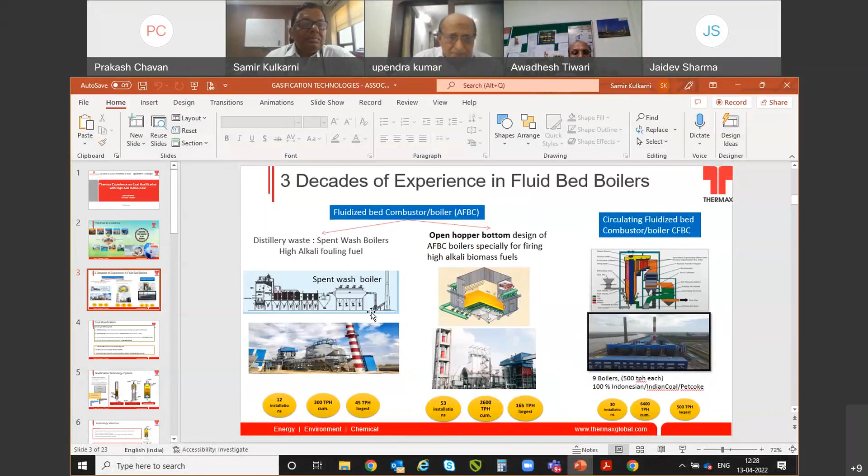Thank you, sir. Can I have the presentation share rights, please? Yes. I'm not able to share the presentation. Yes, sir. Now you can share, sir. Okay. Sir, I think sharing option is not active. Yes, it's visible. Your slides are coming. Is it visible now? Yes, sir. Thermax experience on coal gasification.

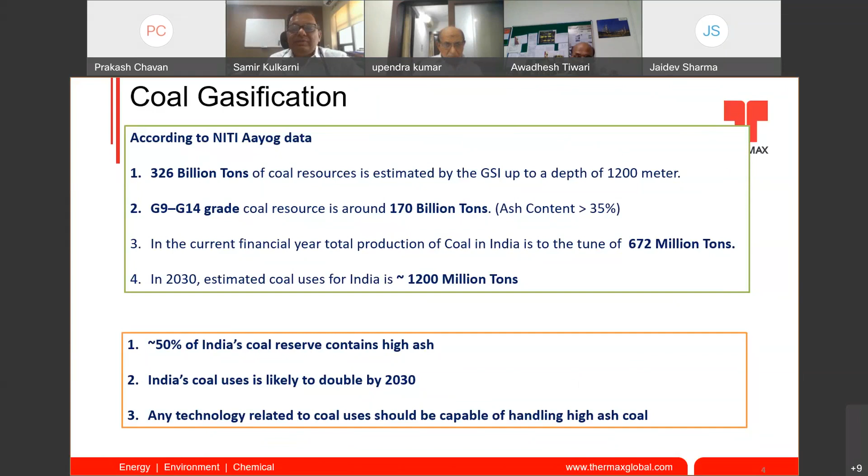So I will just take one slide on the different types of gasification. We started our journey in 2011 looking at different gasification technologies and what would best fit for India. There are 3 technologies: fluidized bed, entrained flow, and moving bed.

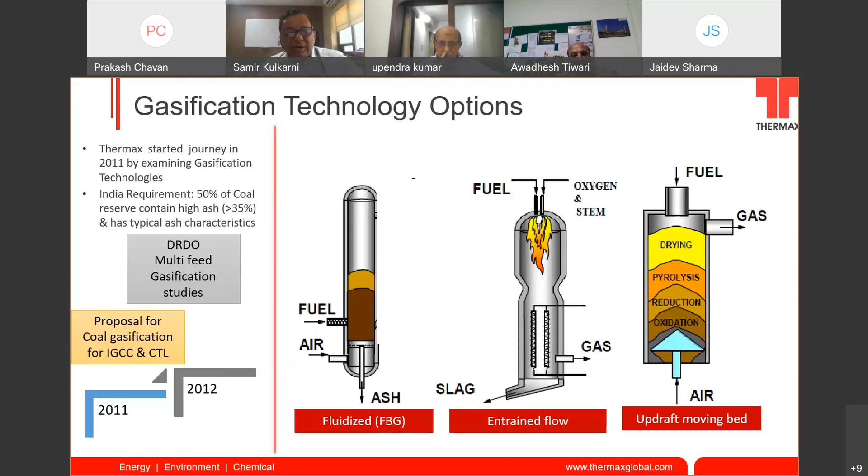As Mr. Tiwari also mentioned, there is not a single technology which is best. All technologies have their own place in this gasification domain. I cannot say fluidized bed is better than entrained flow, but they may have certain advantages and disadvantages when it comes to application, or gasifying different types of coals and producing the required quality of syngas.

So look at the moving bed. It needs a specific feedstock which is less tolerant to fuel quality. It cannot accept fines. In a moving bed, there is a high tar yield, requiring more downstream cleaning equipment, and it becomes difficult when we increase the ash percentage in the coal.

Similarly, the entrained bed requires pulverized coal. Typical Indian coal has more than 1300 degrees ash fusion temperature, so you have to use a lot of flux agents to reduce the AFT, at 35 to 45% ash. The slag removal becomes challenging, so it is more suitable for low ash and high carbon fuels at large capacities.

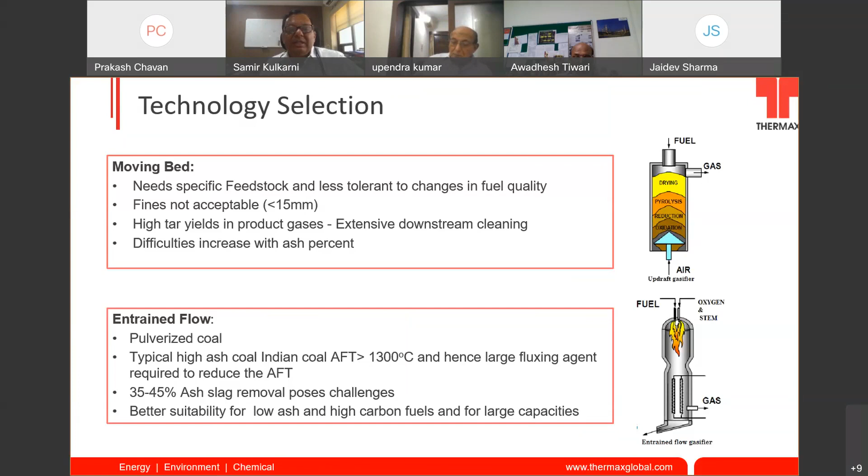These two technologies will generate syngas which is much higher in calorific value compared to the fluidized bed. Whereas with the fluidized bed gasifier, it doesn't require elaborate pulverization mechanisms for feeding. It can accept 0 to 6 mm, so fines also can be accepted.

It can work with medium reactive fuels. It can accept high ash content coal. Its operating temperature is lower, between 950 to 1000 degrees centigrade, well below the ash fusion temperature. So the reliability and availability is much better.

Then it can have better heat recovery and integration, because it is not going into the slag zone, so we can integrate the heat recovery sections in a much better way. And at that operating temperature, there are no heavy tars, so with simple gas treatment, it can work.

So we decided to work on this, and like other Indian institutes such as CIMFR as well as BHEL, we started our journey with the fluidized bed technology. Fluidized bed has different regimes, bubbling - I will not go into those details, but I will take you through the journey of how we started our development a decade back, working in turbulent bed mode, and then looking for a high pressure design up to 30 bar.

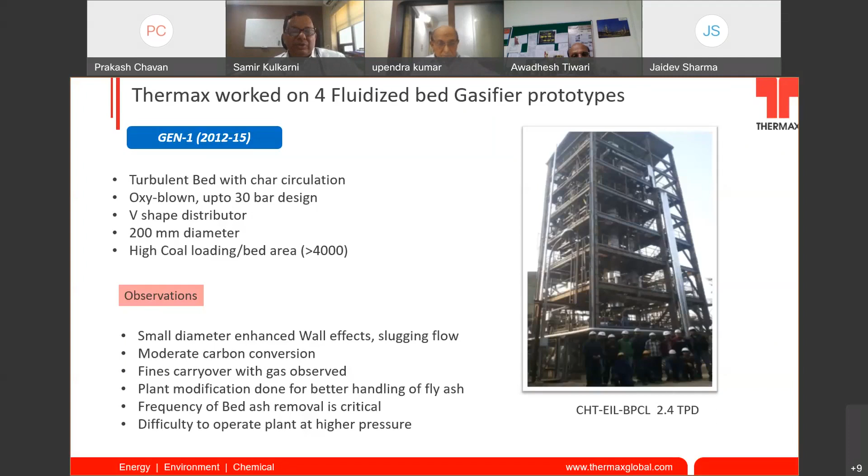So for our next generation fluidized bed gasifiers, we reduced the pressure, operating at 6 bar or less. We built another two gasifier prototypes with a bubbling bed.

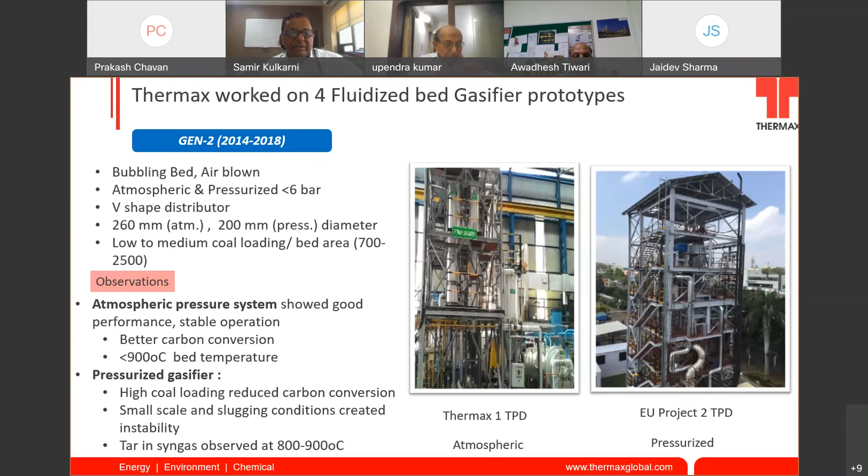One operated at atmospheric pressure, one at pressurized conditions, and all of them had a provision to work under air-blown mode or oxy-blown mode. With these two new prototypes, we overcame many of the challenges. We improved the carbon conversion, and the diameter also became much bigger.

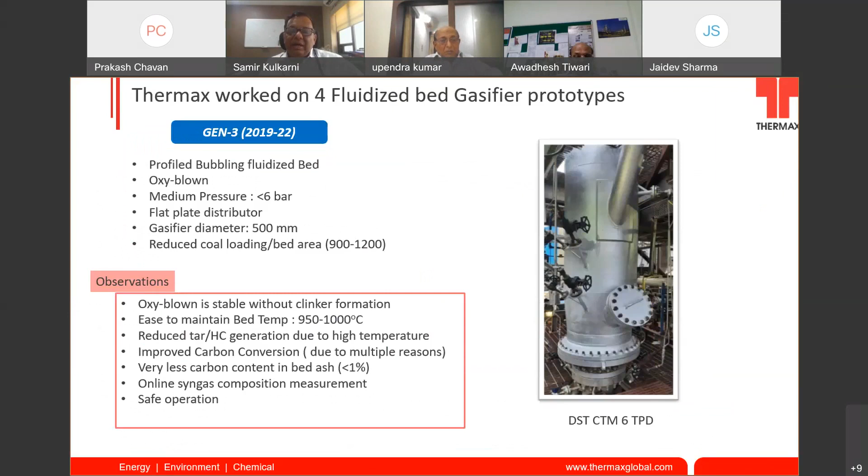So then we went into another model where we went to a much larger diameter and optimized all the parameters for this gasifier. This is the gasifier working for the coal-to-methanol plant, which we recently commissioned and successfully generated methanol. This project was in collaboration with IIT Delhi and funded by DST, with Niti Aayog also very much involved.

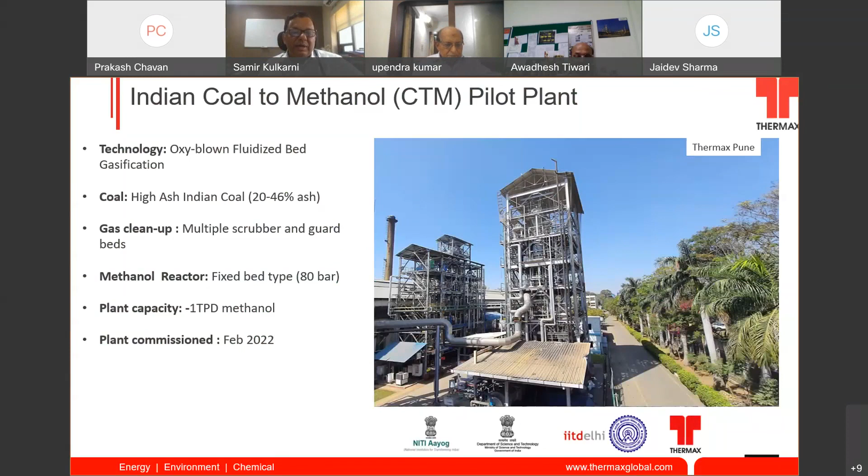We have also tested 46% ash in this particular model, and we are operating it under oxy-blown conditions, connected with all the downstream equipment - gas cleanup as well as the methanol reactor. Since February, over the last 2-3 months, we have been conducting a lot of trials on this.

Basically the gasifier is only one island, and when we want to use it for other applications like methanol production, ethanol, hydrogen production, or other chemicals, it has to go through a different gas cleaning system, because it naturally has a lot of impurities in terms of tars, ammonia, COS, mercury, H2S, or CO2, which needs to be removed because these are toxic in nature for the downstream equipment.

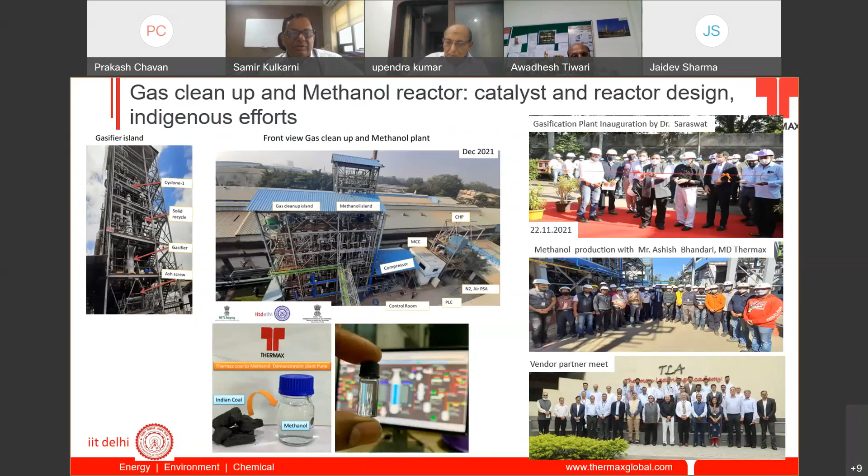We have understood all these things, and now the plant we have built here is stabilized - we are able to generate methanol from coal, and a lot of optimization trials are going on.

Before we constructed this plant, we had done a lot of work on the CFD, because in a fluidized bed, the residence time is very, very important. And to arrive at a particular residence time, what should be the bed height, what should this thing be - we carried out radioactive particle studies along with BARC and IIT Delhi, and arrived at the optimum parameters for the bed.

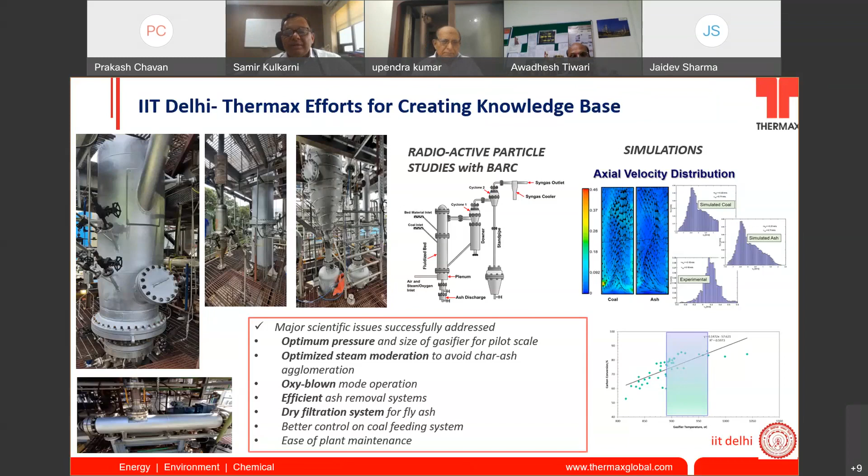So these are some of the pictures of this coal to methanol plant. These are some of the pictures of the test conditions and the quality of the methanol that is getting produced.

We are getting a good hydrogen to CO ratio, and the plant is operating very stably, maintaining the temperature parameters. As you see here, we are using 46% ash coal in this unit.

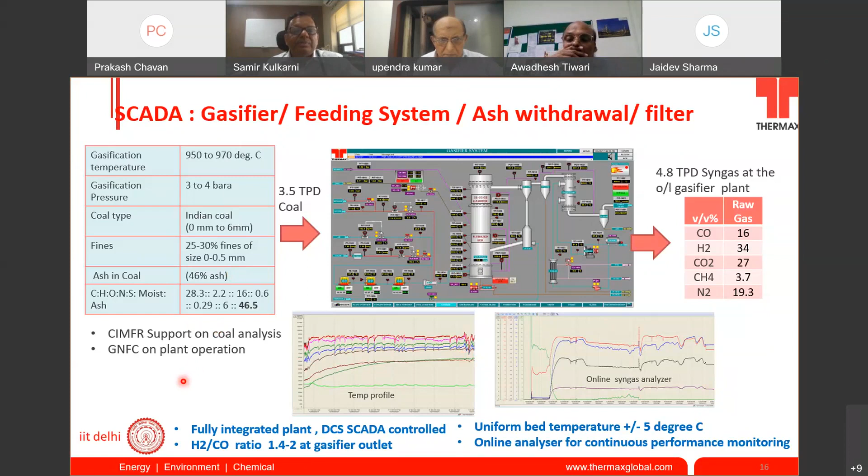Coming to some commercial aspects, since now the pilot studies are over - and we are not stopping the trials. We will be conducting more trials with different types of coals from different mines.

But if you look at the commercial part of this, I'm talking in terms of methanol only right now, because commercially we have seen that the methanol price globally is highly volatile. And today methanol is available at 32 rupees a liter.

And if you look at the cost breakdown structure, normally the OPEX part is about 70% and the CAPEX part is about 30%. And even in the OPEX, about 70 to 75% of the cost comes from the coal and other utilities like oxygen, electricity, water, and other things.

So if you do the mathematics, the operating cost for utility and coal should be restricted within 15 to 17 rupees if these methanol plants are to be made commercially available.

And now, if you work backward, if you want to contain this cost within 15 to 17 rupees, these plants should be at the mine mouth, because it should avoid the transportation cost of the coal.

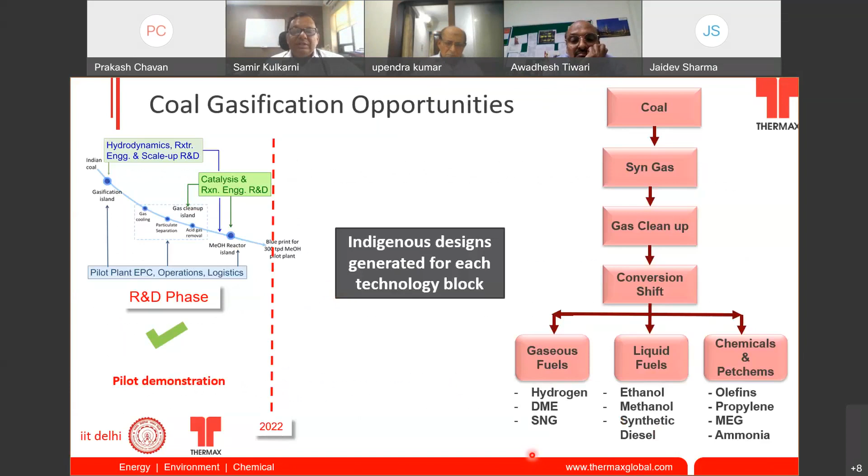Commercially, when all these tenders are coming out, they are in the range of 1500 to 2000 TPD, talking in terms of the methanol plant. So can we go directly from here to the commercial plant, or are there technical risks - do you need to construct a plant of an intermediate scale?

This is something we are discussing with the Ministry of Coal, so that the financial outlay for such a plant can also be minimum. Some financial support is required, because at this scale, whatever scale we do, it may not be a commercially viable plant. So some financial support will be required, and it will need public-private partnerships.

So when we are wondering what should be the plant capacity, we can easily scale the R&D at 25 to about 100 TPD scale, make this plant at about 25 to 100 TPD, and then you don't need any project or financially supported plant. Then we can go directly to the 1500 TPD level.

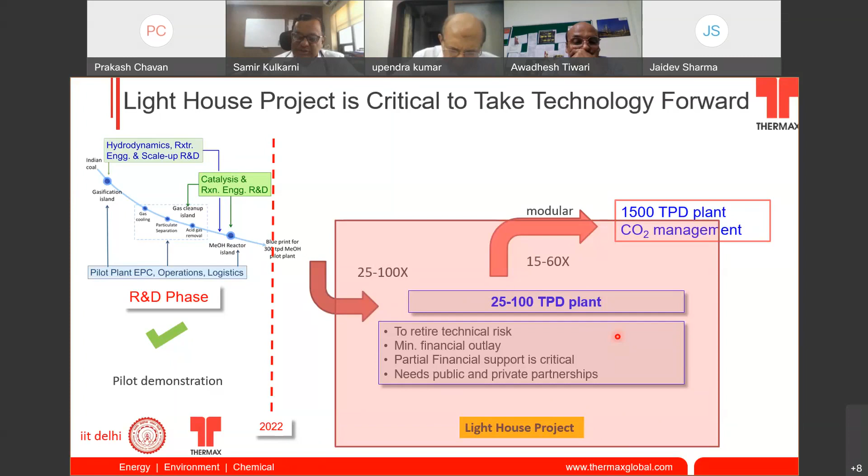So this can be some sort of a lighthouse project which can take the R&D, the indigenous development, to the commercial level with one-step lighthouse project. Of course, CO2 management is a very important point, as also mentioned by Tiwari ji. We are working on this CO2 management, how do you convert it. There are challenges, the availability of green hydrogen at a lower cost, or we are also thinking whether it can be injected back into the mines to generate more CBM. So all these things are going on actually.

So to cut short the story, I'm just making four points in this presentation: fluidized bed technology is well established by Indian R&D centers, whether it's Thermax, CIMFR or BHEL. When it comes to high ash coal, it is the most apt technology. We need a first lighthouse project to take this R&D to the commercial level as an intermediate step. Then there's the coal cost and other factors.

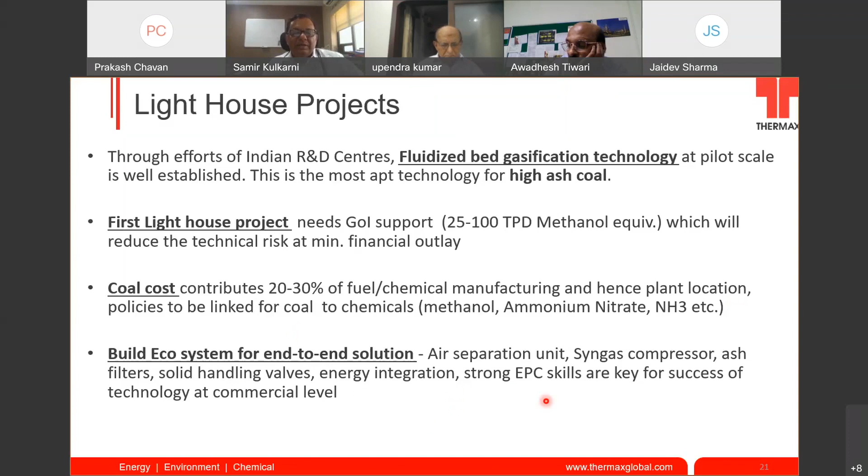We need to look at the commercial viability. We need some support in terms of plant location, policies and other things. We also need to build an appropriate ecosystem for end-to-end solutions within the country in terms of air separation units, compressors, ash filters. There are many components which we have proven at pilot scale, but when it goes to larger scale, we need that ecosystem created, vendors and sub-vendors created for this.

So if you look at coal gasification, this is the total canvas of coal gasification. It can go to power generation with improved efficiency, thereby reducing emissions through the IGCC cycle as one route. You can generate chemicals and fuels from this, so that the carbon is getting fixed when you generate chemicals. When it goes to fuel, it becomes the second use of the carbon.

So there is a decarbonation which is happening. The other thing is there are import substitutes, because there are a lot of industries which use natural gas or furnace oil for heating purposes. Now this coal gas can replace such plants and the use of FO and natural gas for this purpose.

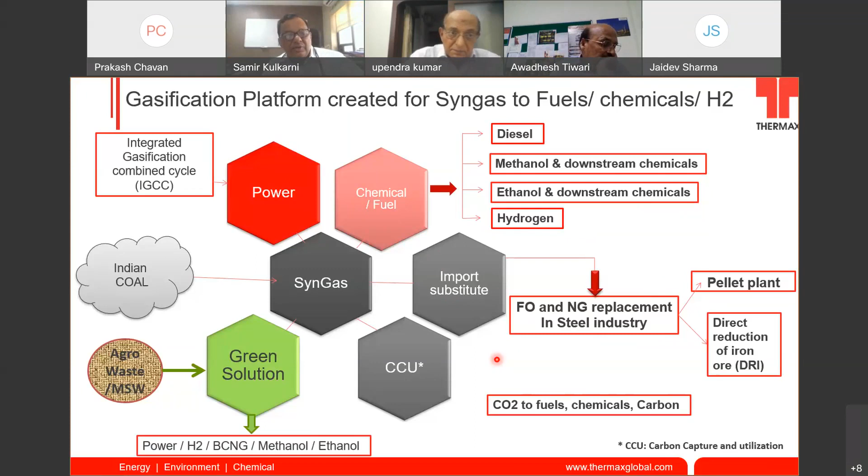Similarly, biomass gasification should not be missed out while we talk about coal gasification, because it's a carbon neutral technology, and there is a lot of work being done in India for biomass gasification also. With this, I think I will stop my presentation here, and I would like to take questions during the last session. Thank you so much.

Sir, you are on mute.

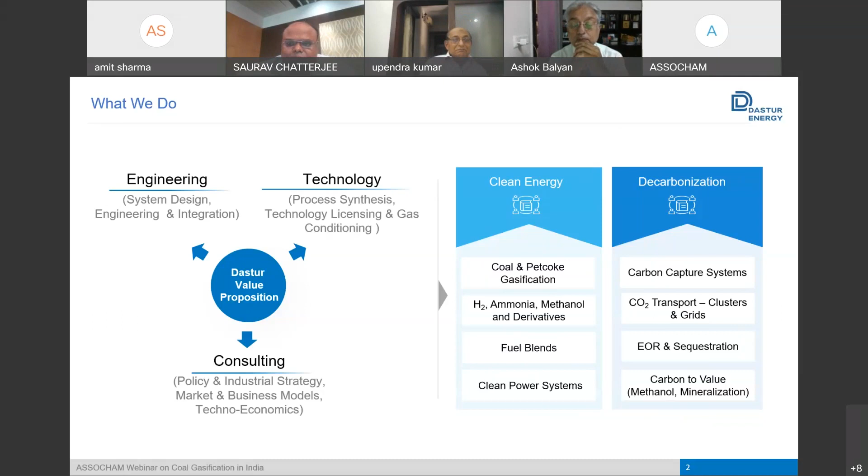How do you do gasification? Forgive me, Mr. Chatterjee. I think Dastur's activities are very well known in the country. They are leading. I'll request you to kindly come to the subject. Right. So the carbon engineering is another area we work on. So these are some of the projects we have done. I don't want to spend too much time on it.

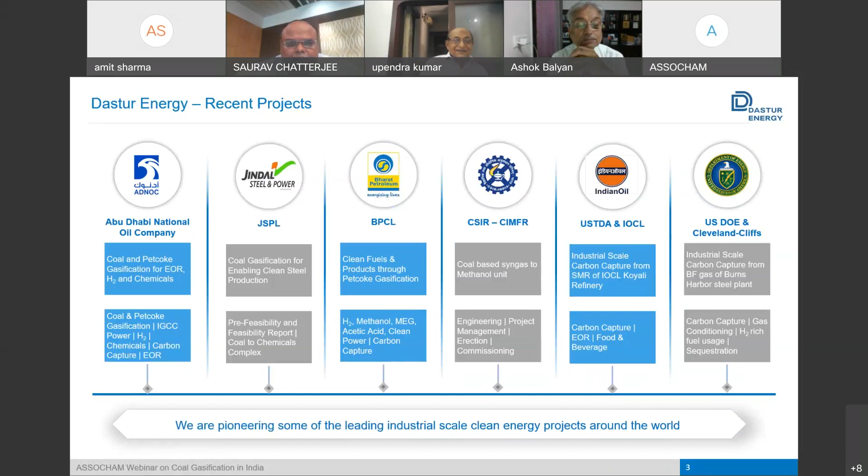Going ahead, what are the key aspects to be addressed for coal gasification really to be successful in India? One is, what is the technology most suited for Indian coals? What are the challenges that need to be overcome, not only with the gasifier island but across the value chain? What are the flexibilities you should have in terms of different products in your portfolio to really have a gasifier project which can react to different market scenarios? So I'll try to dwell on each of these points.

So on the technology front, gasification is not a new technology. The earliest gasifiers came up in South Africa in the 50s, in China in the 70s. But the real challenge for India is how do we handle high ash coals with 40-45% ash content, and the concomitant issues of higher feedstock throughput. How do you handle that? And Mr. Kulkarni has spoken at length on the different technologies.

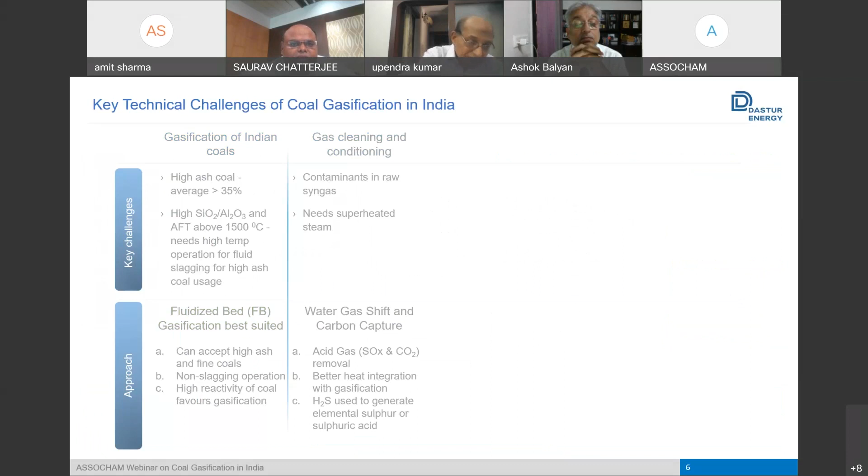Going ahead, if we look at the challenges across the value chain of gasification on the gasification island I spoke about, the next challenge is gas cleaning and conditioning. These are the challenges with contaminants in the raw syngas, and the need for superheated steam for your gas conditioning and cleaning plant. So here, the advantage in the approach is to have a water gas shift and carbon capture island where acid gases like SOx and CO2 can be removed.

And also the steam that is generated through the gasifier operations can be used for the steam duty of your gas conditioning island. So you have better heat integration of the system, and the H2S that is there can also be used to generate sulfur or sulfuric acid.

The next challenge, or the next sequence, is really the carbon management. So you do the gasification. What do you do with the CO2 that is captured through the gas cleaning island? This is a significant challenge for India, because the utilization of CO2 is going to be limited. We have to look at options for sequestration and EOR. The mapping and characterization of pore space is very limited in India, and there is no pilot or demo scale project yet which has been established in India.

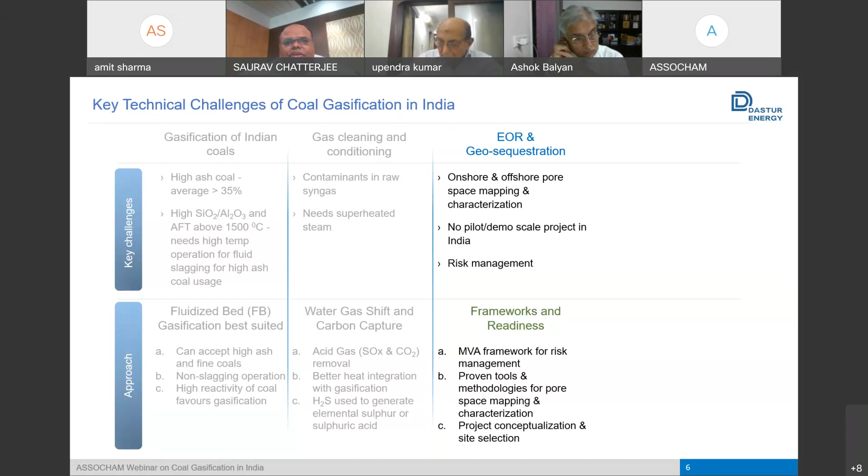So what is really necessary is to establish some of the frameworks, the MVA framework for risk management, adopt some of the tools and technologies for pore space mapping and characterization, and really to conceptualize a pilot or a demo scale project to prove that sequestration or EOR of CO2 is possible in India.

The next part is to do with CO2 utilization. Although this will contribute a small quantity compared to the CO2 volumes that you have to deal with, there are certain technologies which look promising in terms of conversion of CO2 to products. CO2 to methanol is certainly one opportune area, and some of these technologies are nearing commercial deployment.

And one of the speakers also spoke about, when you want to make methanol, the issue is how do you get hydrogen or clean hydrogen to make the methanol with the CO2. So the coal gasification project can be configured in such a way that you have in situ production of hydrogen from the syngas, so you have availability of hydrogen as well as a low cost source of hydrogen, which can be combined with the CO2 to make methanol.

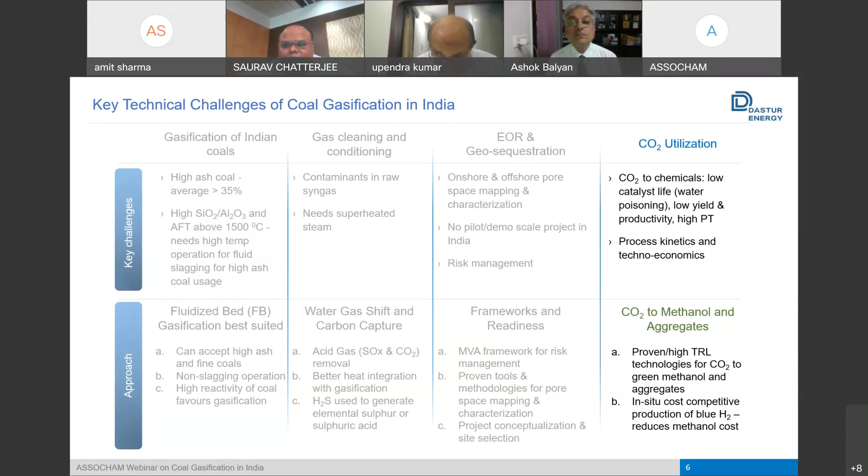Going ahead, the next point I wanted to speak about is really the product portfolio and how do you design a product portfolio which is robust and gives you the flexibility to react to different market scenarios. Just making one product like methanol, which is a low value product and whose price is extremely volatile, brings a lot of risks to the project.

Based on our experience of designing different gasification projects for clients, we believe that it's necessary to look at value-added products beyond methanol. Some of these products could be MEG, could be acetic acid, and the way you really construct your product portfolio is to have components which do not have very high correlation, so that based on the market dynamics, you configure your project in such a way that you can calibrate your production of different products in reaction to the market dynamics.

And apart from having market-facing products like MEG or acetic acid, what can also lend a lot of stability to the financials of the project is to have utility-like products like hydrogen or clean power. So on one hand, you'll have stable cash flows coming from selling hydrogen or clean power, which will contribute a part of the cash flows, and on top of that, you will have market-facing attractive products like MEG and acetic acid.

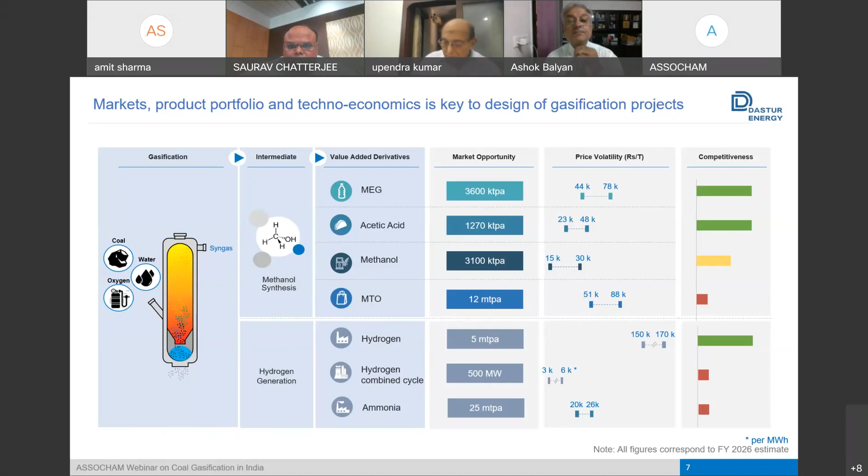So this is a schematic of a candidate project, as I spoke about. This is based on some of the work we have done. This project involves gasification, and we have considered comparatively higher grade coal. This is based on G4 coal, and the syngas produced is treated through the water gas shift and acid gas removal unit, and then the treated syngas is used for methanol production and hydrogen.

The hydrogen is thereafter used for MEG production and generating some clean power, and most of the methanol is consumed in making acetic acid and MEG. So if we look at the project financials with a multi-product portfolio of attractive products, and these products also have a significant import component in the Indian market, this makes for attractive financials.

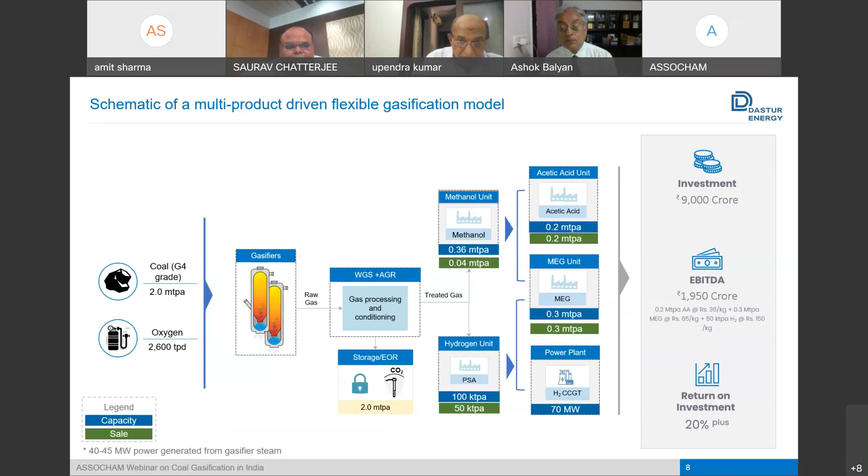Although gasification projects are associated with very high upfront capex, even then you can see, and we have considered market prices, this kind of project can generate a healthy return on investment northwards of 20%. Thank you, Mr. Chatterjee. So, I had not finished.

Okay, another point I wanted to make is that apart from the different chemicals and hydrogen, coal gasification can also drive the hydrogen economy in India, because we talk about green hydrogen from electrolyzers, but at the current cost structure, it's not really sustainable. So even a coal-based gasification model where the main product is hydrogen is also very sustainable. It seems to be an attractive proposition.

Okay. Thank you. I think in the interest of time, we conclude. Thank you, Mr. Chatterjee. So, Mr. Rahuel George, are you ready? As you know, we have already consumed our time. Mr. George? I'm very much here, sir. Just a second. Can I get the rights for sharing, please? Yes, I will try to. Do you have the rights? No? Not yet. Okay, I have. Thank you. Can you see my screen, sir? Yes, sir. Please go ahead. I am sorry for that technical glitch, Kumar Saab. I don't know, there was some issue.

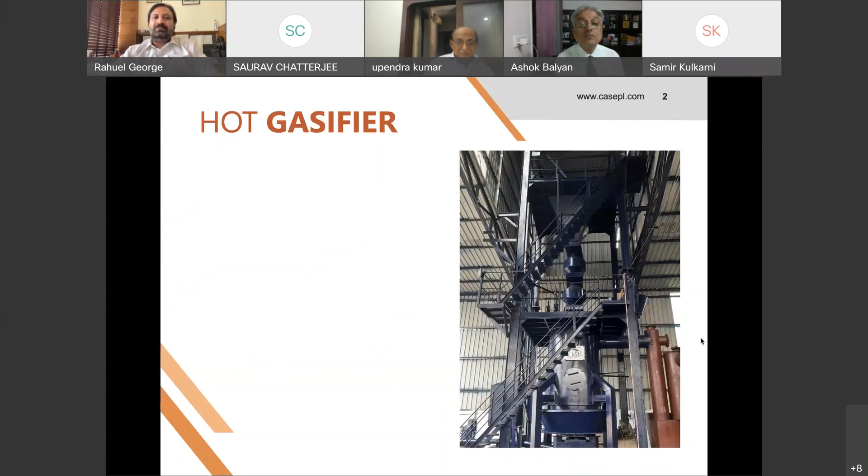Yeah. Okay, thank you. This is the first of our variants. We call it the hot gasifier. This is basically a fixed bed gasification, using 15 to 60 mm coal size. It's a hot gasifier because the temperature of the gas that comes out from the top of the gasifier is over 450 degrees.

Owing to this property, this is a zero liquid discharge technology, because beyond 350 degrees, the tar or the volatiles in coal remain in vapor form, and we take it to the point of combustion and burn it there. There is no condensate that comes out from this system. So this is an absolutely zero liquid discharge technology.

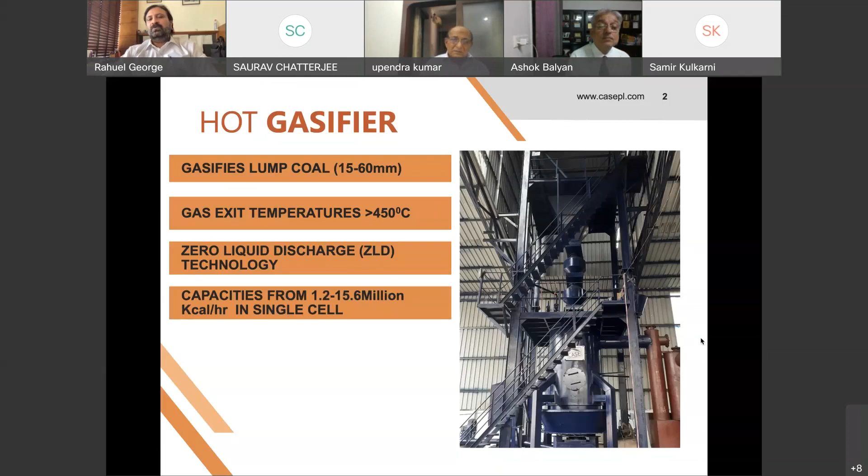The capacities of these gasifiers per cell range from 1.2 million to 15.6 million kilocalories. The biggest model we are doing as per cell size is around 4.6 meters in diameter. The gas heat values, because of the presence of tar in the gas, may reach greater than 1800 kcal. These are very suitable for secondary steel mills like rolling mills, heat treatment furnaces, strip mills, refractories, etc. We have more than 200 installations of such gasifiers in India.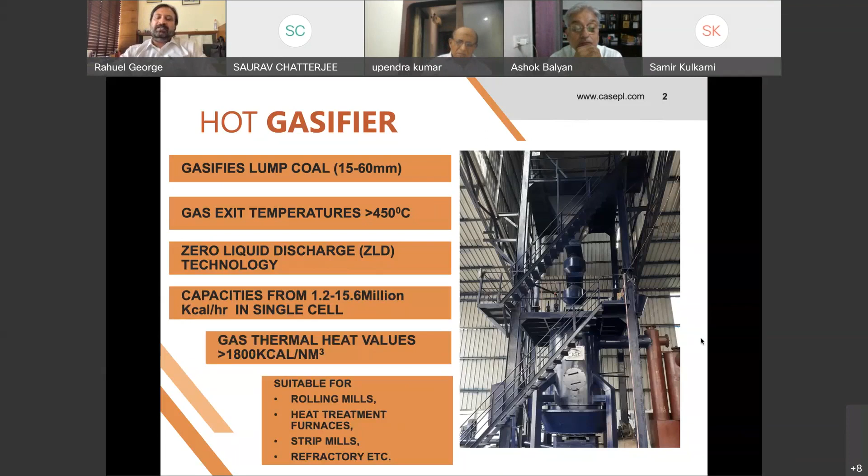Then we entered into the clean gasification technology. This is again a fixed bed gasifier. In this, we basically reduce the temperature and clean the gas before it is used for utility. Lump size used is 15 to 60 mm. Gas exit temperatures are less than 45 degrees. Here, we reduce the temperature and take out all the condensates and the tar in the gas before we give it to the utility point.

The tar and the condensates are very professionally managed. All the phenol or the condensate that come out from this gasification technology are recycled back into the gasifier and used as steam, as gasifying agent. So there is no disposal of any kind of liquid from this technology as well. That's why we have termed it as a ZLD technology.

The capacities again vary from 1.2 to 15.6 million kilocalories per cell. The biggest model would be 4.6 meters diameter. With this technology, we are able to have burner level automation at the topmost. Automation can be achieved with this because of the cleanliness of the gas and because of the temperature of the gas.

This is a pyrolysis technology in which the gas that passes through the gasifier also cracks the volatiles of coal into high calorific value CnHm. Because of this, the calorific value of this gas is higher than normal gasification and reaches greater than 1400 kcal per Nm3. These are suitable for automatic rolling mills, glass plants, pellet plants, aluminum plants. If any kind of automation is required, these gasifiers are very much applicable.

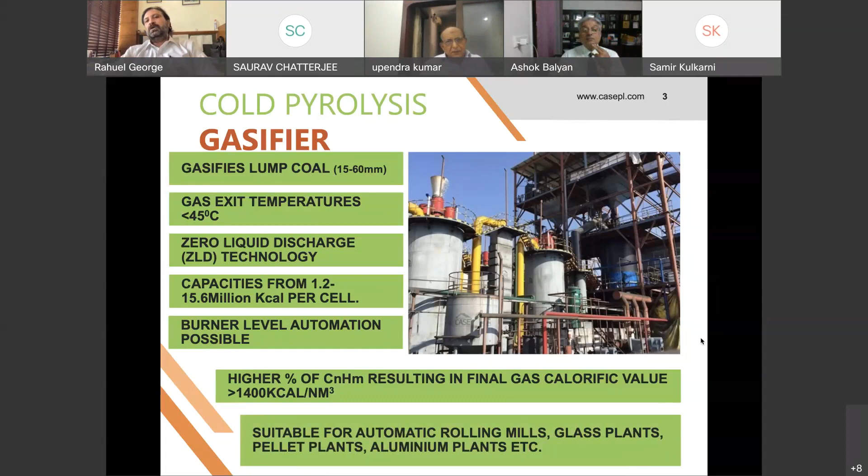Then we have the CFBC gasifier technology. We have a tie-up with a Chinese company called KEDA. They are masters of gasification in China. I would definitely agree 100% with Mr. Tiwari that, rather than doing something indigenous and wasting a couple of years on this, we already have technologies for this. We should get this technology, Indianize it, and start implementing it without wasting time. So we already have a technology for CFBC gasifiers.

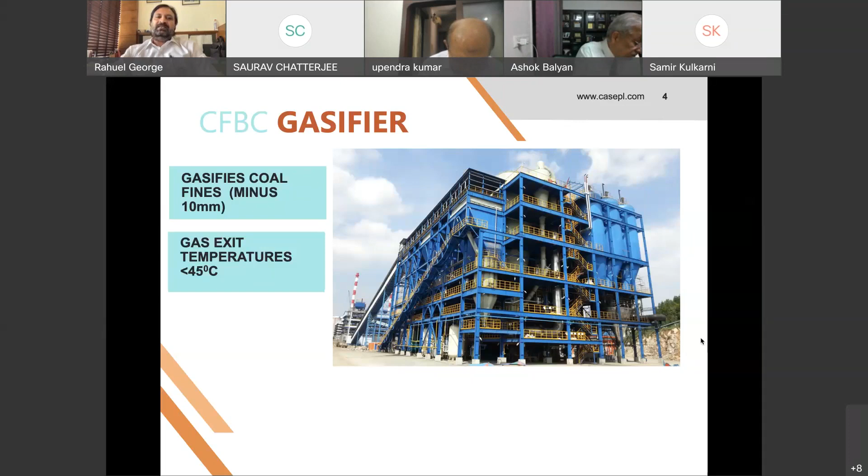This gasifies coal fines minus 10 mm. Gas exit temperatures are below 45 degrees. Zero liquid discharge. There is no tar, no condensate that comes out from this technology. These are big gasifiers, so the capacities are high, 13 to 78 million kilocalories in single cell. Gas thermal heat values are greater than 1300 kcal per Nm3. These are suitable for aluminum calcination, pellet plants, integrated steel plants, basically big applications where the gas requirements are very high, thermal demands are high.

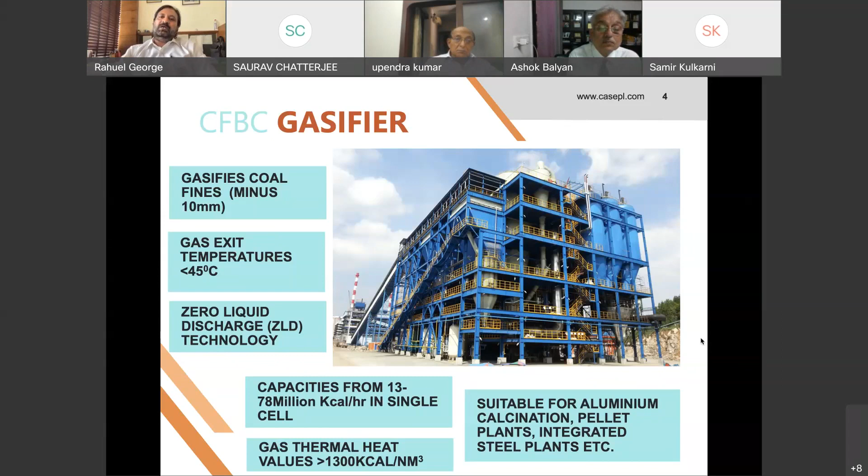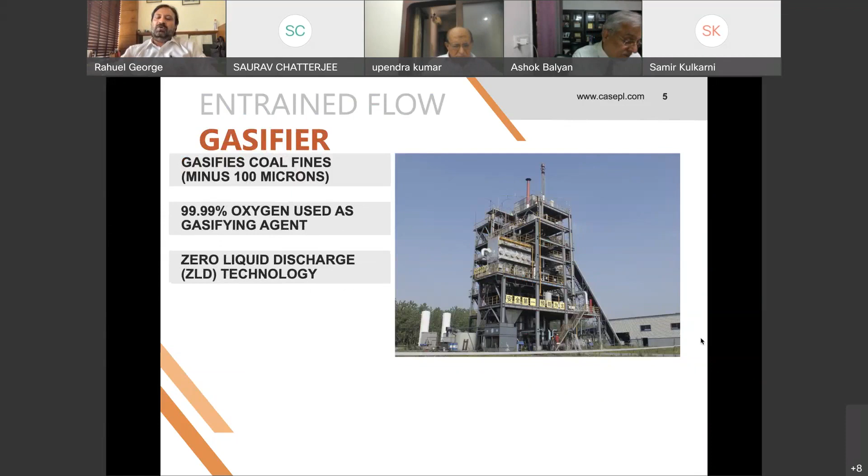Then we have the entrained flow gasification technology. This is basically gasifying pulverized coal minus 100 micron. We can use 99.99% oxygen as a gasifying agent for this technology. This is again a zero liquid discharge technology. There is no condensate and no tar that comes out from this system. These capacities are again large, 25 to 200 million kilocalories per cell.

The final gas calorific values can reach up to 2500 kcal because of the oxygen being used as a gasifying agent. There is very negligible nitrogen in this gas. Local high ash coal fines can be gasified, thus making this the most efficient gasification process. Though the capex of this technology may be high, it has the lowest OPEX for any gasification technology available today in the world.

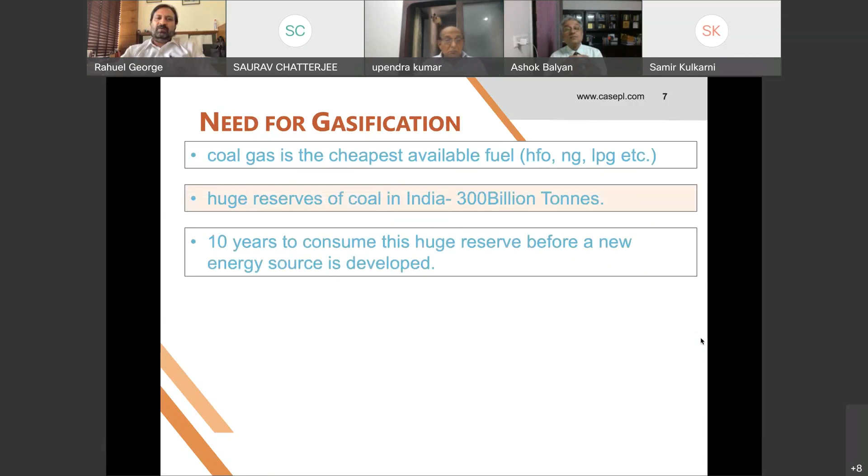This is the vision of our Honorable Prime Minister to gasify 100 million metric tons of coal. I would say that, with 200 to 250 gasifiers running in India, we are already consuming a lot of coal, and this is a very much achievable target, which has been set by our Honorable Prime Minister, and we should work diligently towards this. Need for gasification, I'll just be very quick. I think I'll skip this because this has already been covered by one of the presenters here.

Here I would like to share that all the gasification that we are doing in India, we are working on the Atmanirbhar Bharat movement. Basically, all of our fixed bed gasifiers are manufactured 100% in India. For our CFBC gasifiers and our entrained flow gasifiers, 80 to 90% of our project supply is from India. Only critical parts are being imported from China.

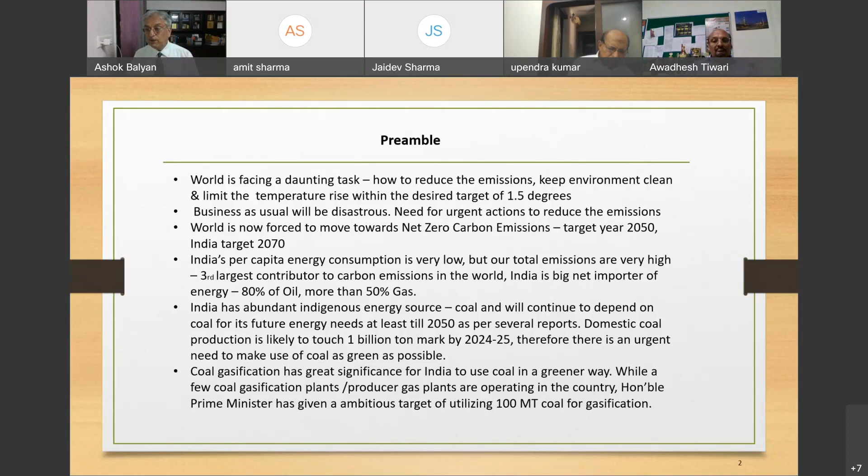We need to really recognize the things that are changing very fast when it comes to opportunity for coal gasification. As we say, that's a very promising way of using coal in a greener way. And it really gives us diversification opportunities going into different products. And we regard it - I personally see it as a new business segment that is evolving in the country, and we need to really see to make it successful.

We have in India now initial experience where companies have really invested into plants. They have also gone into problem solving, learning from their investments and technologies, and have come out of that also. So I think we have very significant good experience now, and I think we are all set that we need to really look at this very differently now with the experience with us. We also see that the present and future coal gasifiers need to come under one umbrella so that we can make coal gasification viable, commercially viable and lucrative as far as the country is concerned.

I think in India, the industry has realized that only a collective and focused approach of all stakeholders in the coal sector will help move to a higher level of performance and achieve the ambitious target set by the Honorable Prime Minister. Collective information sharing, brainstorming, some R&D work, and advising government authorities on what would be an appropriate policy framework to make it more commercially viable and investment friendly.

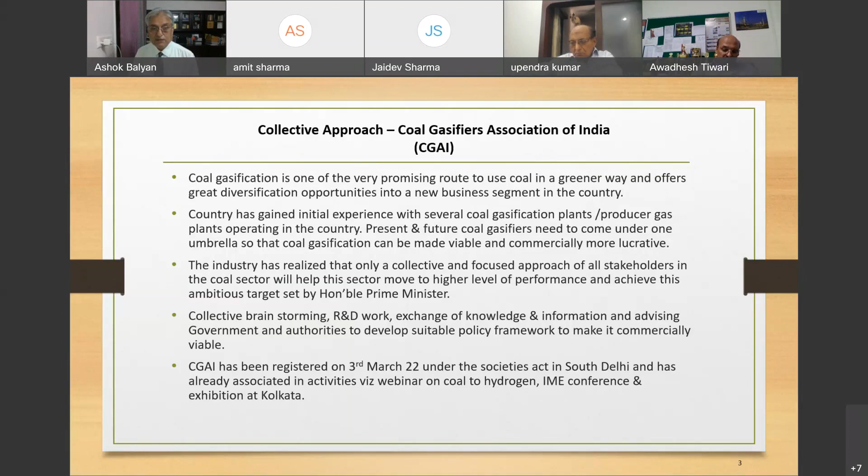It's very heartening to see an effort by the industry to come together to share all the knowledge and move ahead to make this segment of business more lucrative and attractive. We all know it offers several advantages, and we need to really capitalize on the various opportunities that exist for coal gasification.

When we look at the national perspective, it fits in so well with the national goals. One is reducing our dependence on imports. It's unfortunate that India, with all its vast resources, still imports coal to about 250 million tons per annum. This is one area we can really address while pursuing coal gasification and reduce our dependence on that, also perhaps reducing dependence on our import of oil and gas.

The second aspect is self-reliance. It helps us become Atmanirbhar, as another colleague also talked about, and some of the value-added products would help us achieve this national target. Third, very importantly, no energy source now is examined for use without linkage with emissions, so this would also promote and fit into the national perspective that the government is pursuing. From all points of view, it's very suitable for India to pursue coal gasification.

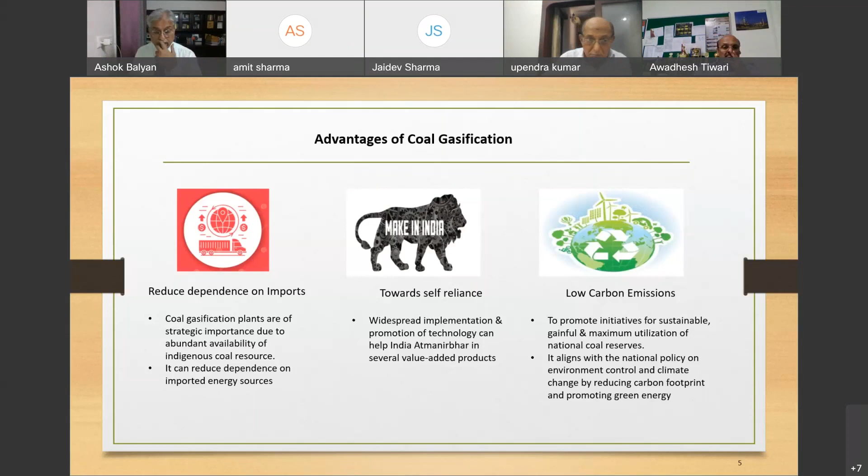The Indian government has very nicely recognized the potential and benefit of coal gasification, and they've proposed 100 million tons of coal gasification by 2030. This would perhaps bring in investments of over 4 trillion rupees, which is pretty good.

We are also happy that many suggestions made by the industry through the forum, while formulating the Coal Gasifiers Association of India, and through interactions with the government and policy makers, have been included by them in actually formulating the coal gasification mission.

We also see certain follow-up actions that the government is taking, where a steering committee has been formed under the chairmanship of Dr. Saraswat, with members from important stakeholders like the Ministry of Coal. We also see major players in the industry like Coal India all set to implement 3 gasification plants at different places, and moving ahead to bring other companies together for a comprehensive implementation of coal gasification and use of the products.

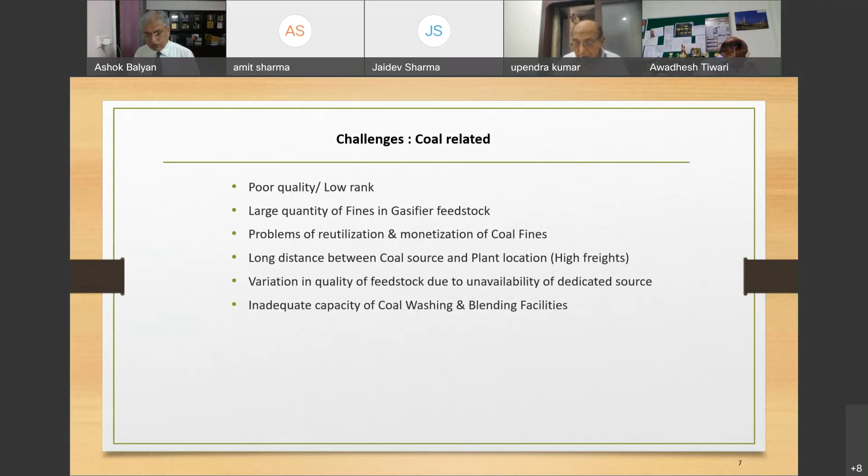There are, of course, several challenges which are coal related, and I'm sure my co-panelists would talk about those. Some challenges are environment related, where we have large effluent coming out of the plants.

How do we really address such an important thing? We need to be conscious of that. We have to somehow achieve net zero emissions; the target set by the Prime Minister for India is 2070. This can only be achieved when we start right now on addressing the emissions aspect. Issues like carbon capture and ash content are so important for India - these are environment related issues.

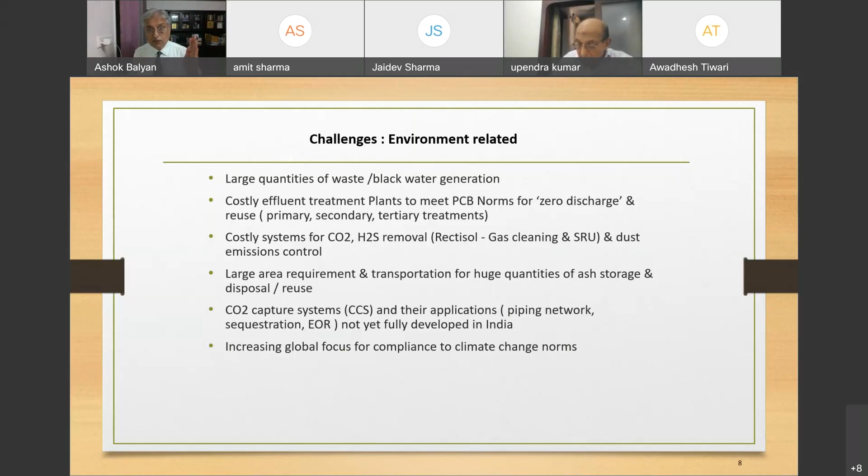There are, of course, technology and project related issues which some speakers have talked about - how do we really customize the technology to suit Indian coals? And also, while planning and implementing a project, we should target products which have so much demand within the country, so that can be addressed, and we don't have to again look at importing.

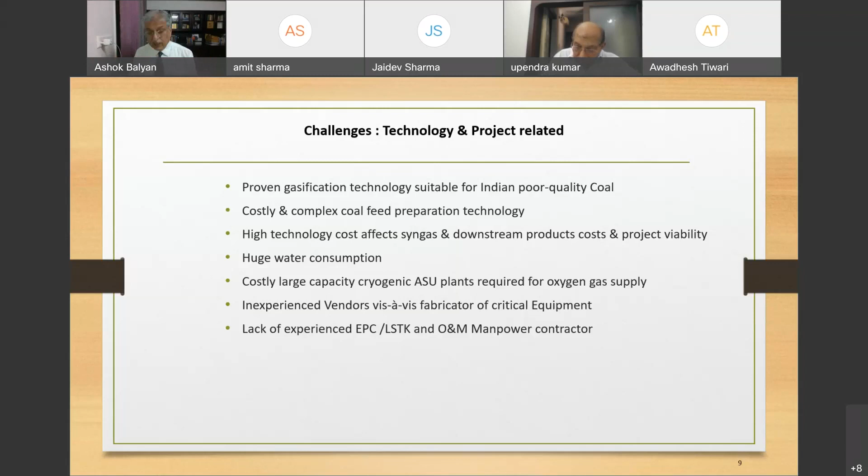So the technology and project related thing, and also the policy related aspects. Here I would like to really see that as an association, Coal Gasifiers Association of India, we recognize this an opportunity of a new business venture in the country.

We also feel that there is a need for a policy framework which facilitates coal gasification by way of coal allocation in the same way as it is done for the power sector. Also, the coal pricing should be as under regulated sector. That would be really very beneficial for taking off of this new venture.

We also would like to see that coal gasification also has long-term linkages, and that this particular sector is recognized as an infrastructure sector. These are the issues that the Coal Gasifiers Association is pursuing, and we are now very actively involved. We would like all the participants of this webinar to please get in touch and become members of this association, so that we can collate all the issues and take them forward with the government and other concerned authorities, to see that a very favorable policy framework is developed for all the coal gasifiers in the country.

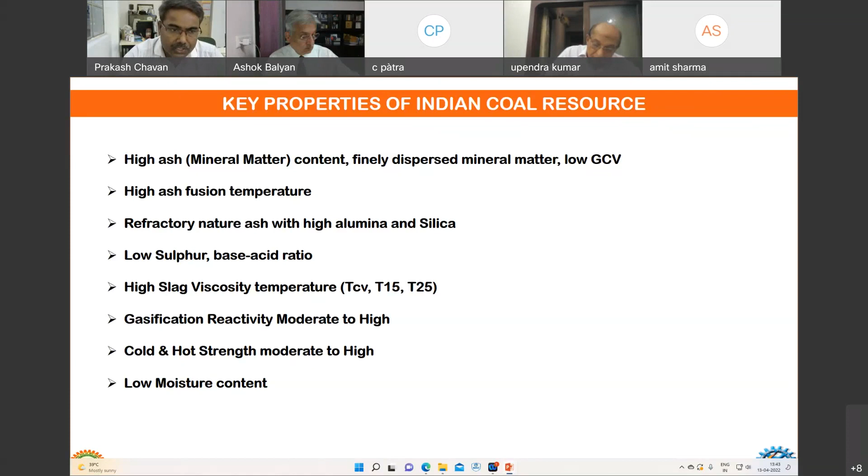For Indian coal resources, mainly as we know, ash content is on the higher side. Then other certain properties like ash fusion temperature or its nature, its composition, all these also we need to take into consideration. We will not go into detail about these properties, but we can say some specific type of nature is there with Indian coal resource that specifically we need to concentrate on. And on the basis of these characteristics, we need to take decisions.

Several technologies are there for coal gasification under three different categories. Out of these, few are commercially matured or proven technologies. People are utilizing these technologies in different countries. Even in India, we have few projects with developed or commercially proven technologies. But again, we can also exploit these technologies for certain reserves or even for high ash containing reserves also. But in that case, some washing, blending will be needed. So again, economic feasibility and those aspects also we need to take into consideration.

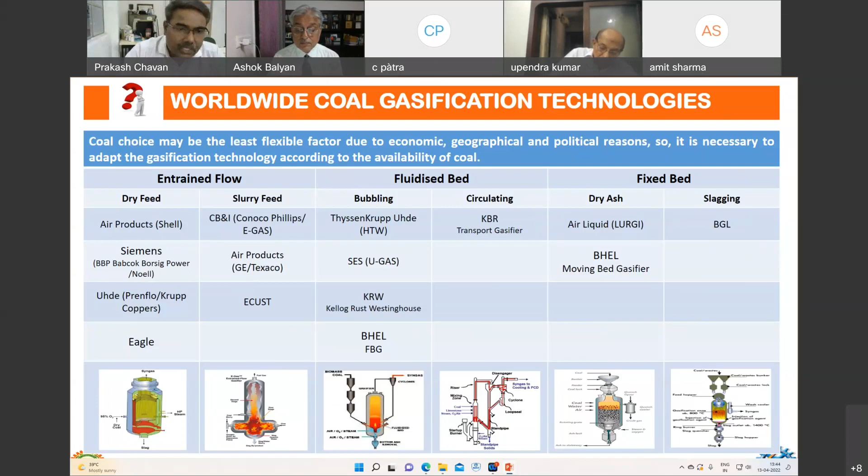So parallelly, another thought is there for suitable technology where directly, without any pre-processing, coal resource can be utilized. So these are the important aspects we need to take into consideration while selecting technology as well as identifying the particular resource for matching with the particular technology. So certain permutation combinations are definitely required for that. And with thorough brainstorming, Government of India under the leadership of Niti Aayog has targeted certain programs.

Option one is definitely, as mentioned by earlier speakers, mainly entrained flow technology, proven technology. And the first targeted project is Dankuni Coal Complex project utilizing ECL coal, which is low ash coal. Another few projects are already there; Patra sir has given light on that also. Parallelly, development of indigenous technology. Why indigenous? Because under the fluidized bed category, proven or tested technologies are not available. That's why development of indigenous technology under fluidized bed is taken up as an important option, as option two.

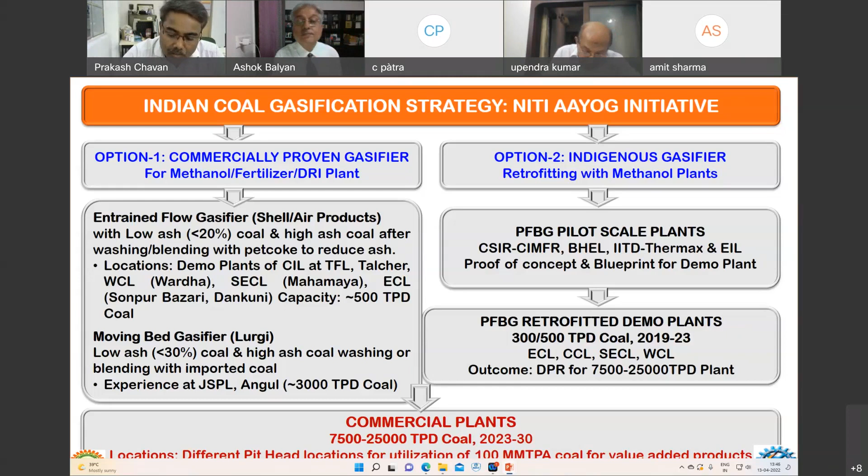Already, few organizations have developed, including CIMFR, Thermax, BHEL, at pilot scale level. And now time has come to upscale these developments to demo scale, so that we can compare these developments with commercially available technologies and an attractive option one can take forward to fulfill our requirements and the Government of India's programs in the area of gasification.

So in line with this Government of India program, CSIR CIMFR is also pursuing the program in the area of gasification. We have very good facilities, including all the aspects related to gasification, right from characterization, bench scale, pilot scale facilities to evaluate the performance, to develop the strategy or utilization pattern. Apart from these directly linked facilities, we have very good facilities for supporting activities also, including pre-processing, crushing, screening, or if required, washing. We have a very systematic analytical hub, also a training and skill development center.

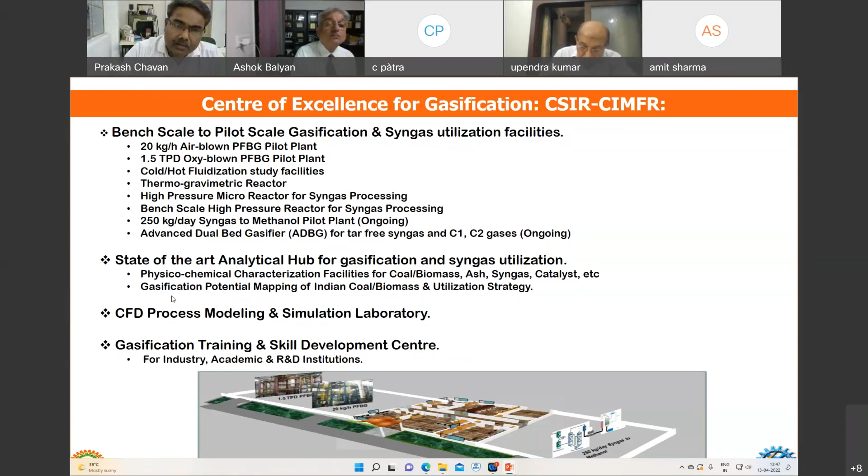And with this capability, Niti Aayog entrusted one important activity, gasification potential mapping. Jointly, CIMFR and CMPDI have completed this activity. We have covered 3 subsidiaries of Coal India, MCL, CCL, and ECL, with mines identified by CMPDI on the basis of available inventories as well as linked, non-linked status, and other strategic decisions. And we have developed a thorough characterization matrix with all the characteristics, around 10 to 12 characteristics.

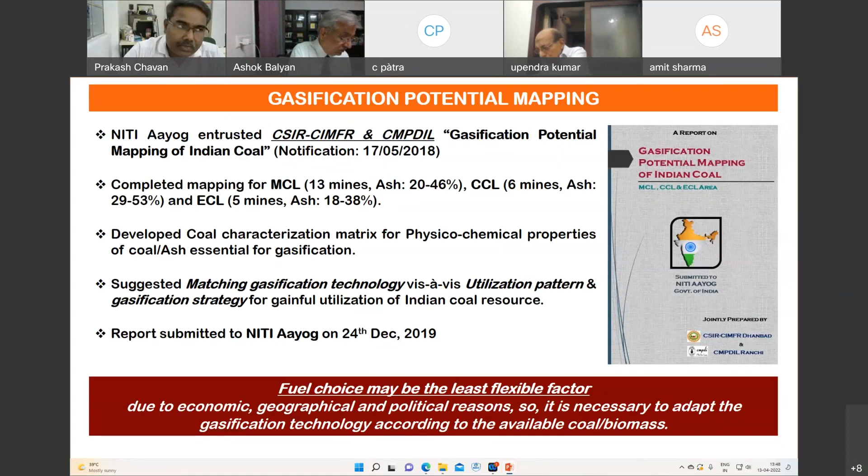On the basis of this particular matrix, we have suggested what should be the utilization pattern for each specific resource, and what should be the strategy for selection of a particular gasifier for a particular specific resource. So this entire exercise we have completed. Definitely we need to extend this exercise to the remaining resources also. This is needed before thinking of any venturing for other resources and other subsidiaries also. So this is related to the characterization part.

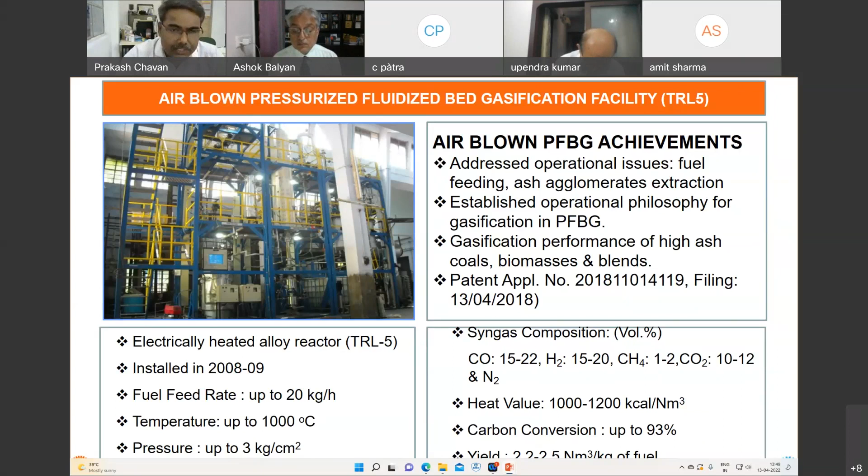Now coming to the gasifier development part, we developed an air-blown fluidized bed gasifier in 2009. We have tested coal resources from a few subsidiaries in the pilot scale facility also. With air-blown gasification, the CO and hydrogen composition was attractive, though it is not suitable for applications like methanol, fertilizer, or DRI, but for thermal applications and power generation, even air-blown is a good option.

Then after getting confidence in the earlier development, we upscaled this facility, and now it is an oxy-blown fluidized bed gasifier installed in November 2020. We have tested high ash coal resources from the MCL and CCL area. Now we have established operation with a suitable operational philosophy. The syngas we have achieved through this facility is quite attractive for value-added applications, including methanol, liquid fuel generation, or any downstream application. Carbon conversion and syngas yield are also good, quite attractive.

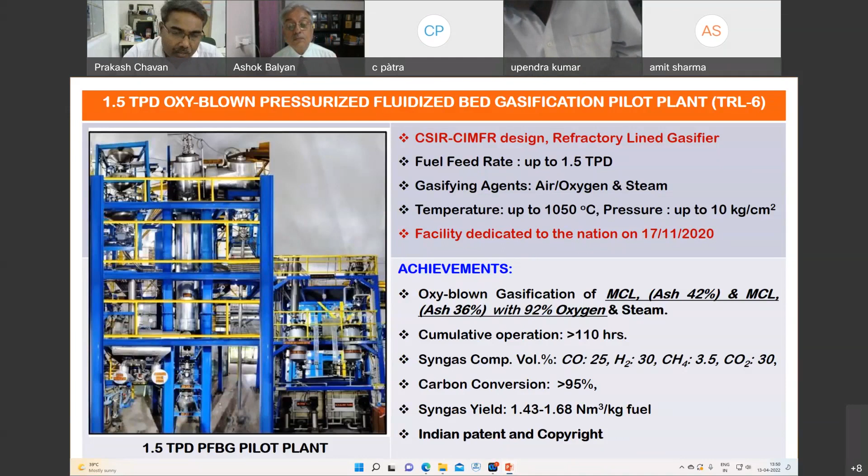It is a pilot scale development, so certain aspects related to upscaling we will definitely address in further developments, mainly related to establishing the engineering components as well as emissions and byproduct management related aspects.

What is the scale, Chavan sir? What is the scale of this pilot? Yes, sir. This one is a pilot scale having a capacity of 1.5 TPD coal feed rate. Okay.

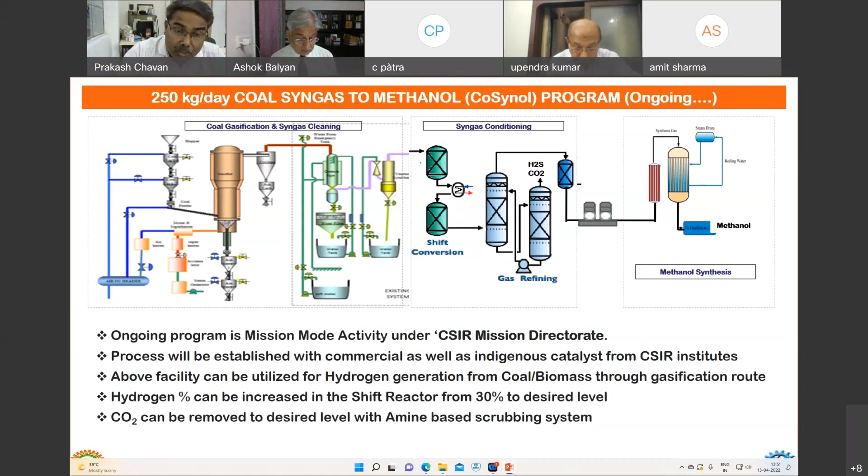So now the target is to develop. We are already in the process of developing downstream modules also for syngas micro cleaning, conditioning, as well as syngas to methanol, and for other suitable applications which we can conduct in this particular facility apart from methanol. Now, because we have already completed development at pilot scale level, what should be the pathway?

Another 2-3 minutes, Chavan sir, please. You have to wrap it up. Yes, yes. Just 2-3 slides, sir.

Simultaneously, to handle any feedstock when we change it, that's why this important aspect comes into the picture: there should be consistency in the feedstock. Otherwise, in any chemical industry, a standard operating procedure is quite sufficient to operate the plant, but in the case of phenomena like gasification, we need to develop a feed-specific operational philosophy every time. That's why consistent feed supply is essential. Thorough characterization is essential for developing operational philosophy as well as selection and development of technology. These three important aspects we need to take into consideration.

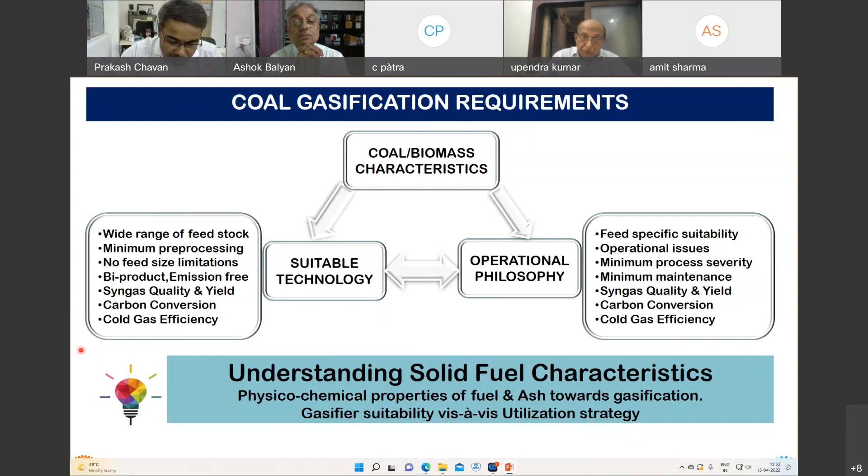Now coming to what should be the next step. Yes, definitely understanding of fuel. The Ministry of Coal has already initiated activity related to the Dankuni Coal Complex project, where an entrained flow gasifier will be utilized. Our target is to take forward the pilot scale development to demo scale with a suitable operational philosophy, and simultaneously consider polygeneration, because cost is always the primary factor in any decision. A single product facility may not become economically attractive.

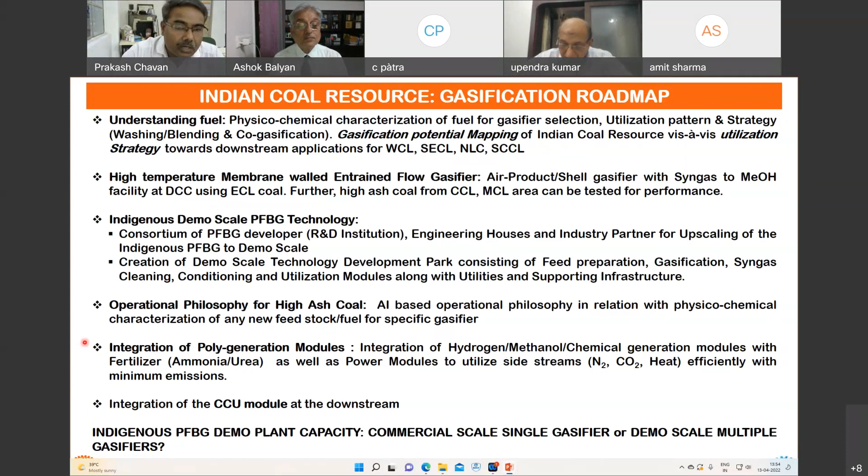Several side streams are there, including nitrogen during oxygen generation, as well as CO2 during conditioning of the syngas for methanol or any product. So we need to utilize all those streams. It should be a combination of fertilizer plant, power generation plant, and targeted product, so that we can take maximum gain, maximum output with minimum emissions. So polygeneration should be taken into consideration. With these aspects, we are suggesting two combinations. Option one is a dedicated facility including all the modules, right from pre-processing, gasification, syngas cleaning, conditioning, to methanol.

So this demo facility, if we target, it should be a strategic facility at some strategic location, where there should be the possibility to include further developments, to retrofit further developments at each and every module, because since it is an indigenous development, we need to take care. Though it is somewhat capex intensive, in the long term it will be more beneficial.

If capex related aspects are considered a concern, then directly we can go with the developed pilot scale gasifiers and install the demo facilities at some readily available facilities like GNFC, where methanol generation and a fertilizer plant already exist. So one can install a demo scale facility in the nearby area near GNFC, or at the proposed plant at Dankuni Coal Complex. So the indigenously developed plant can be retrofitted with these commercial facilities, and once we gain the confidence and prove the attractiveness, then we can take forward this indigenous development also.

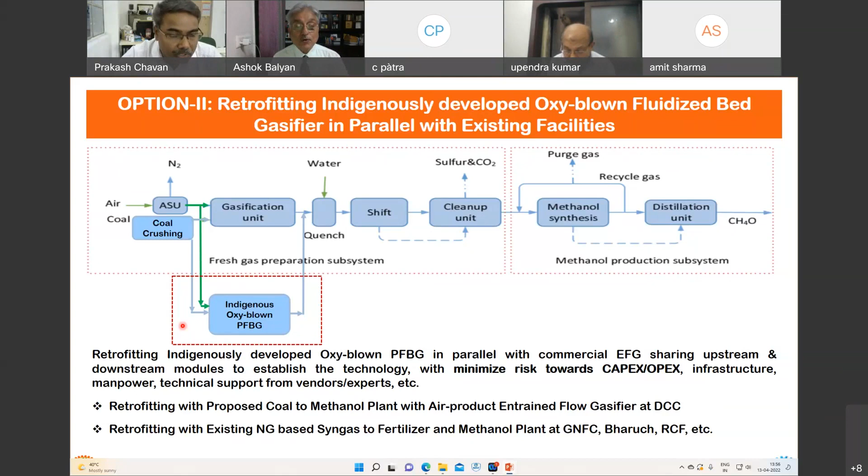So this is all about our view. Thank you, Mr. Chavan. That's a very good presentation, and I see you are proposing some very specific locations for specific plants based on your studies. A good amount of work has been done in terms of potential mapping of the coals, and I'm sure this is going to help coal gasification in a very significant way. Thank you very much for your presentation. Thank you very much, sir.

Good afternoon. I am Prabhakar, General Manager, Central Marketing Group, BHEL, New Delhi. I will just brief about what we are doing in PFBG. We were early pioneers, and we'll just run through these slides. This has been already discussed by many panelists. This is the dichotomy India is facing today. On one hand, we are the second largest producer of coal, with so many billion tons of reserves.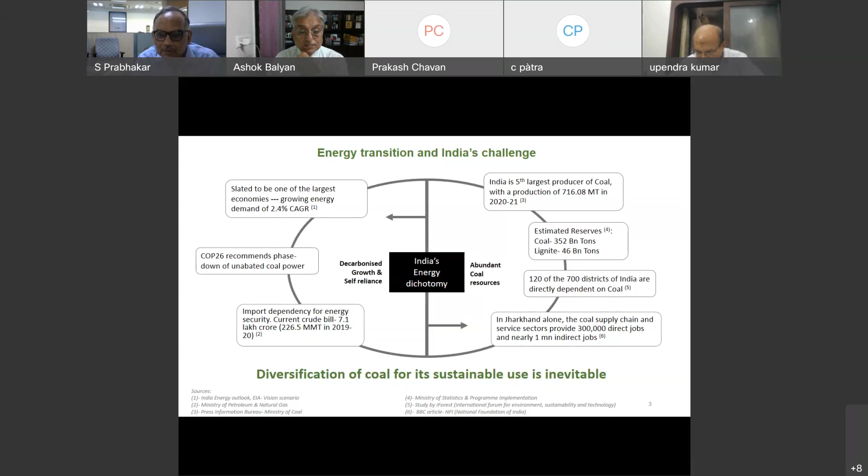On the other hand, climate change is recommending a phase down of thermal coal power, whereas we are a growing economy and our import dependence on energy is increasing. So diversification of coal for its sustainable use is inevitable, and I believe gasification is one of the best ways to diversify coal. BHEL, just a brief overview: we are one of the largest public sector engineering companies in India, into thermal power, and we were one of the pioneers in gasification and fluidized bed combustion technologies, especially our BHEL Trichy unit. Just to recap, this was our timeline journey in gasification.

Way back in the 1980s, we developed a 150 TPD moving bed gasifier for integration with IGCC. At that time, the focus was not on producing chemicals through gasification, but on power generation. So the government of India asked us to do something in IGCC, and we set up the 150 tons per day moving bed gasifier. But we faced a lot of issues like tar formation and low conversion efficiency. Then we set up an 18 tons per day pilot at our corporate R&D in Hyderabad, based on fluidized bed technology.

Once we got good feedback from that, in 1997 we set up one of the largest gasifiers in the country as of today, a 168 tons per day PFBG at Trichy, with a 6.2 megawatt combined cycle demonstration plant. It ran for quite some time. Based on that, we were supposed to put up the first IGCC based power plant in India at APGENCO, 182 megawatt. But for some non-technical reasons, that could not happen.

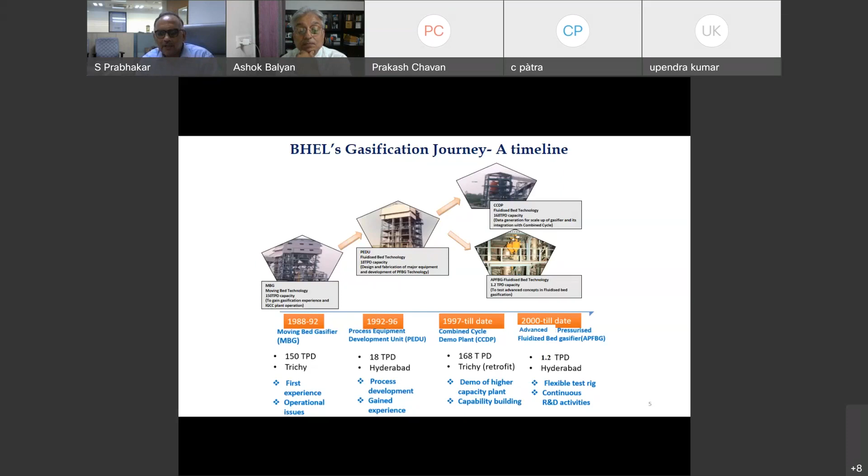As some earlier speakers also shared, at that time the comparison was made with supercritical and ultra supercritical per megawatt cost of generation, and the policymakers felt that IGCC need not come now. Had it come, it would have solved a lot of our problems. We continued our research, and in 2000 we put up a more advanced pressurized fluidized test rig at the IICT campus in Moula Ali, Hyderabad, along with our corporate R&D.

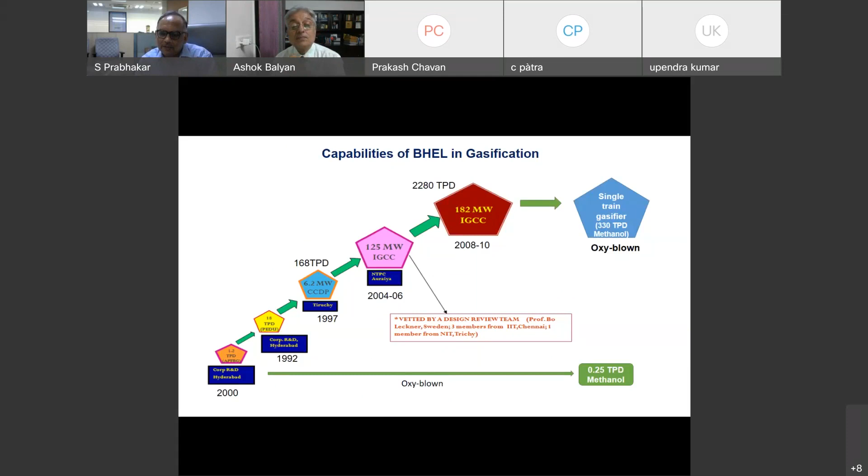Our 168 tons per day plant at Trichy was air blown, generating syngas with cleanup for running a gas turbine. But in Hyderabad, we developed the oxy-blown one. This is a view of the plant at Trichy.

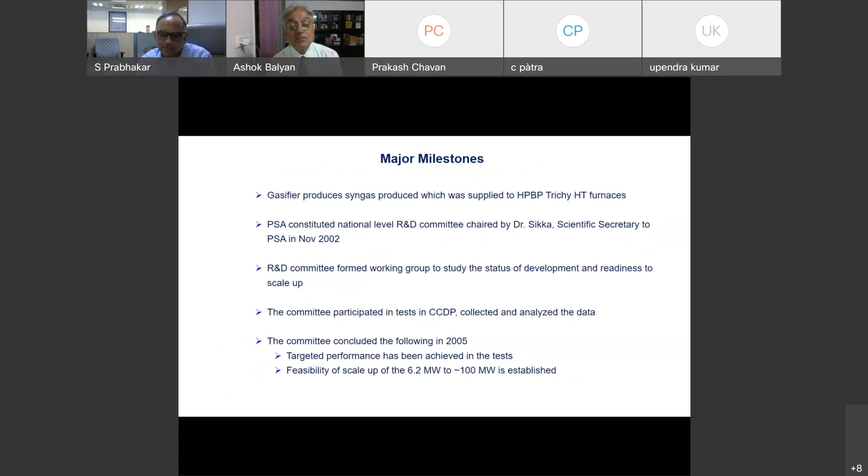This is in brief, which I had already touched. Way back in 2002, we were supposed to develop a combined cycle IGCC plant, and we were ready with it. And what I want to highlight is that the feasibility of scale-up from 6 megawatt to 100 megawatt was established way back there. But the IGCC could not come up.

Next one. So what we did recently is, under the aegis of Niti Aayog, we got some grant from DST, just like what Thermax has done, and we developed our nation's first 0.25 TPD coal to methanol demo plant at corporate R&D. And this is a fully functional plant, and this has established basically that without the help of foreign technology providers, we are able to get methanol from high ash Indian coal. So this was a watershed achievement, and it was inaugurated in September 2021, and the Minister of Heavy Industries dedicated it to the nation in Jan 22.

Next slide. These are some of the snapshots of those plants where we have demonstrated our capability in coal gasification. This is still working. This plant is working? Yeah, it is working, sir. How is the performance? Yeah, performance is quite nice. We are able to get 99% A grade purity methanol from 42% high ash coal, which we source from Singareni. So at this scale, it is fully established.

And you use the power from where? Pardon me? Power you use for the plant is generated where? No, the power is taken from the grid. This plant was set up by the side of our gasifier plant. And the syngas feed, what the snapshot you see is the coal to methanol plant. The gasifier is by the side of that. And we established all the modules, the cleanup module, the synthesizer module. We in-house designed it, and we manufactured it locally.

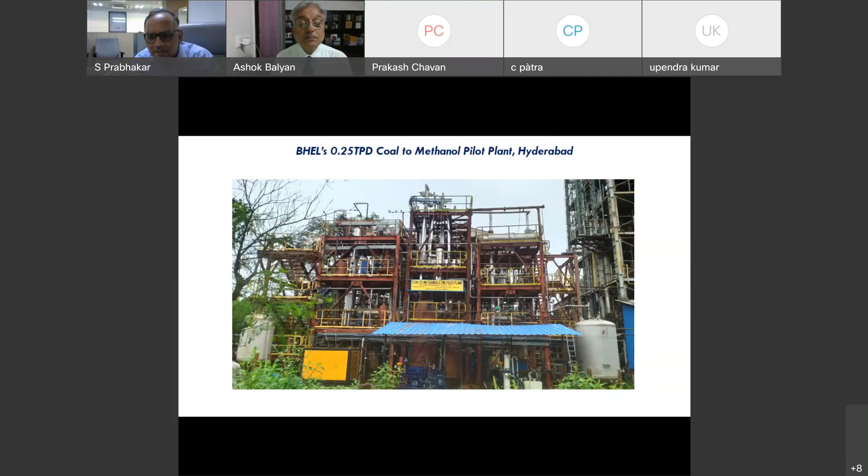Next slide. This is what we are immediately approaching. We are parallelly working on in-house development of syngas to chemicals on a commercial basis. But to meet the immediate requirements, as Patra Saab also mentioned, we are working with Coal India for their central coal field for a 2,000 ton per day ammonium nitrate plant. For that, the gasification island is fully established. We have scaled up also.

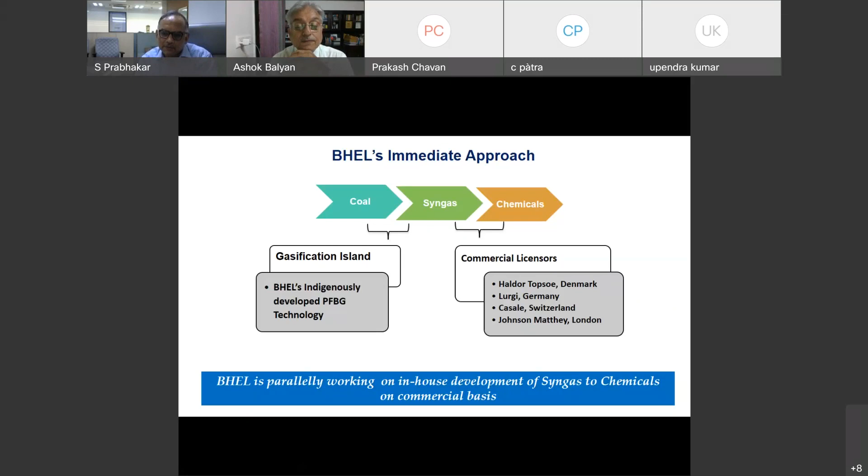But for the time being, we'll be going on with commercial licensors from those who are the world leaders in this area. But in the longer run, this is the mandate the government has given us for being Atmanirbhar. We'll be working to scale up this methanol plant, and similarly try to develop this facility for generation of other chemicals like ammonia and hydrogen. So this is the way forward. Next slide. I think this summarizes whatever I have already told. In case of any doubts, I am happy to clarify.

Thank you. I'm just interested in your second point, the experience in development and operation of a pilot 6.2 megawatt. What is it? This is the IGCC, Integrated Gasification Combined Cycle plant, which we have in Trichy. IGCC basically combines a steam turbine with a gas turbine, so the combined output is 6.2. But the highlight is the gas turbine is not run by conventional natural gas. It is run by syngas. That's what I wanted to know.

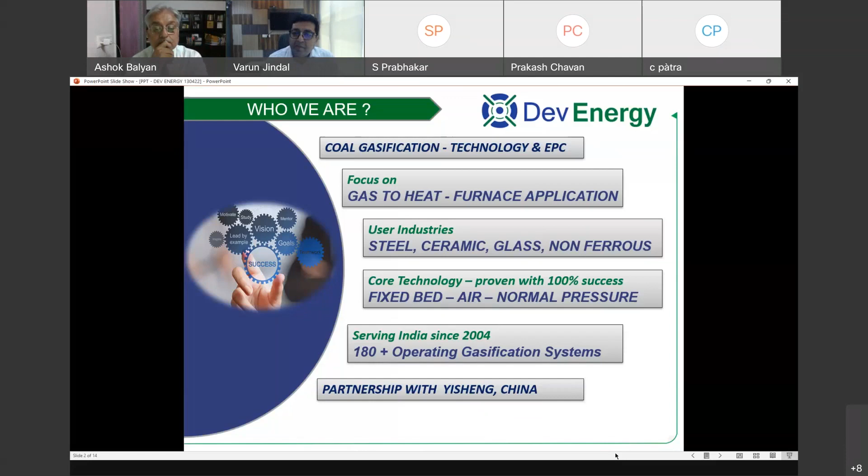This is one of the largest fixed bed air-blown gasifier makers in the world, and this is another aspect I want to highlight. You see, as a group think, we are all shying away from China. In the last presentation also, BHEL is talking of world leaders. I would say they are not world leaders. They've just done a few plants which can be counted on fingertips, and the Chinese have done maybe 100 times more plants than all these people combined, right? As a country, we are not accepting Chinese licensors or technology providers or service providers into our fold, and probably missing a very big opportunity.

Now, what is our technology? It's fixed bed, updraft, two-stage gasification where VM is taken out separately, carbonized gas is taken out separately, and then we use 7 stages of cooling and cleaning, and we can generate a gas of 1400 kilocalorie and a cleanliness level of 40 mg. This is gas which is probably usable as fuel in almost all applications. Between us and our parent companies in China, we have around 45 different industry applications running perfectly well across the world.

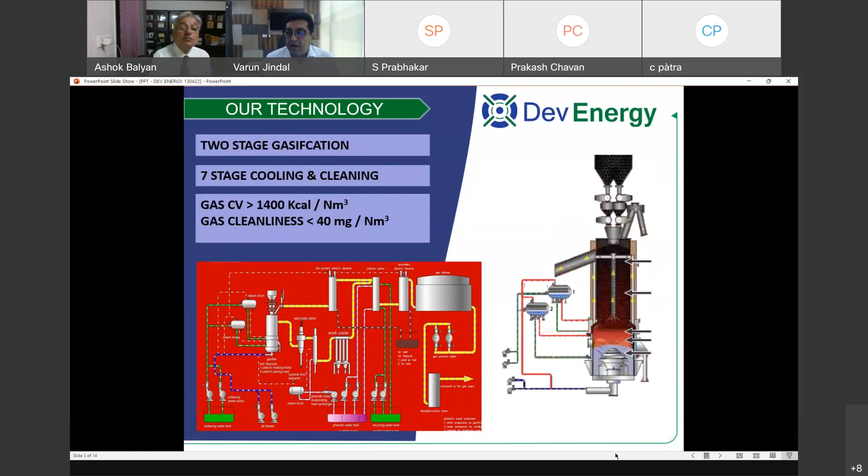These are some of the plants we have done. I can develop plants which can use 100 tons of coal per day to 1,000 tons of coal per day. This Jindal Patratu plant is designed for around 900 tons of coal per day. It can use any grade of bituminous coal; I have gasifiers running on almost G14 grade coal, up to G3 coals. And over the last 18 years, the saving versus furnace oil per 1,000 calories, if you do all the mathematics of total net cost, has been in the range of 40 to 60%. So I'm writing 50% as an average number.

So these are the sizes of the plants we can do. Some of the largest brands of tiles, some of the largest brands of pellet are working on our gasifiers. 24/7, 365, no backup fuel, nothing, right? So what are the opportunities? I think most of these opportunities have already been highlighted.

One I want to highlight is low SOx emissions in the furnaces, because the system will keep the sulfur with it, and the gas will go out without sulfur. Whereas all other fuels, furnace oil, anthracite coal, they all have high sulfur, right? And the second point I want to highlight is about reliable and proven. There is no experimentation in this fuel gasification industry, right? So it's reliable, it's doable.

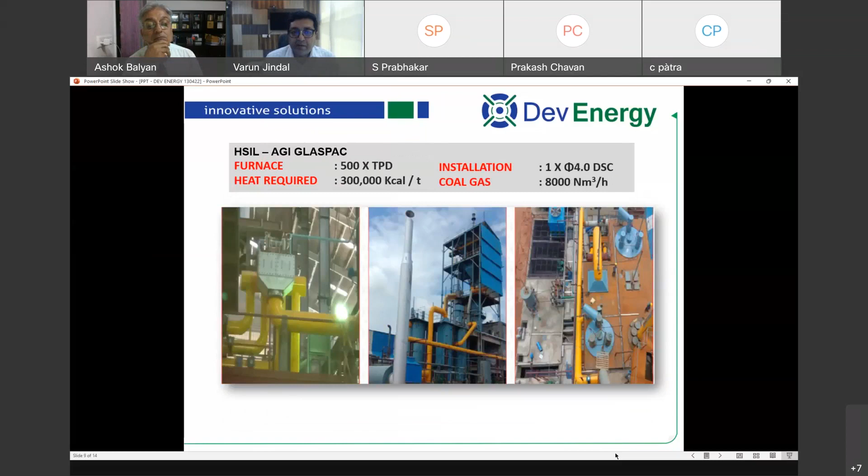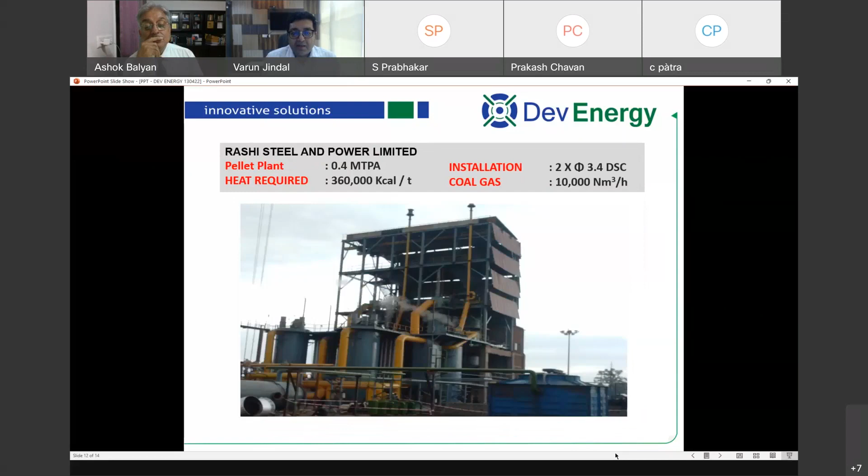This is a pellet plant running on gasifier. This is another pellet plant running on gasifier. This is a straight grate pellet plant running on gasifier. These are tile plants running on gasifier. The gas quality requirements are very stringent, because a slight amount of tar, dust, or sulfur will spoil the quality of the tiles. Thank you.

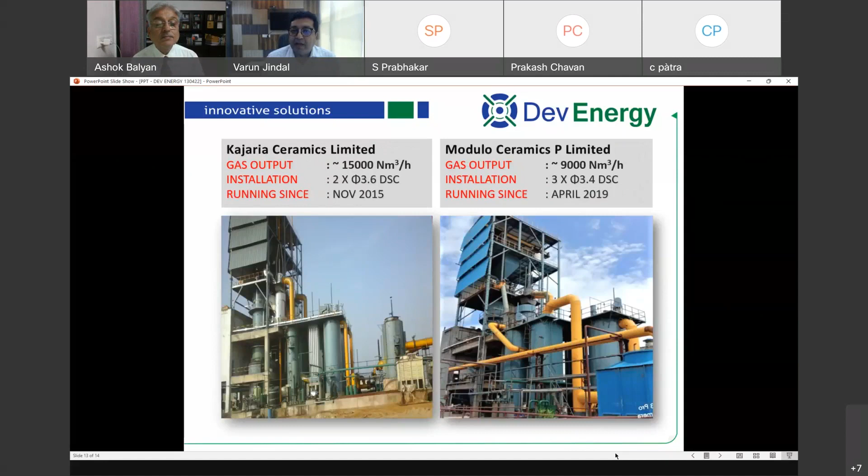Thank you very much, Varunji. I think very valid points, and one important takeaway is how do you really make a suitable framework for funding of such projects? I think there are different options available, and the government must be looking to support such projects. One way could be viability gap funding, which is done for several projects that are demonstrating a new development. So that could be one.

Ashokji, in terms of fuel gasifiers, there is no need for viability funding because these plants pay back in less than a year. Yeah, I mean it depends on the payback and other factors, but for the initial investment, the money needs to come from the banks. So there are other options we need as well - we need to put some framework. I think this is important, and we are taking it up as an association to help investors come together to move ahead on this. But it's a very important point, and I take note of it.

Number two, China has much more experience, no doubt, in terms of coal exploration, coal usage and gasification. I know more than 15 years back, our L&T had designed coal gasifiers for them - initial gasifier technology had gone from India there, when they had no such experience. But over the last 15-20 years they have moved ahead dramatically. So no doubt they have more experience, and I'm sure at some point in time the exchange of technology and access to it may become available, depending on several other national issues that need to be addressed. But thank you very much for your presentation.